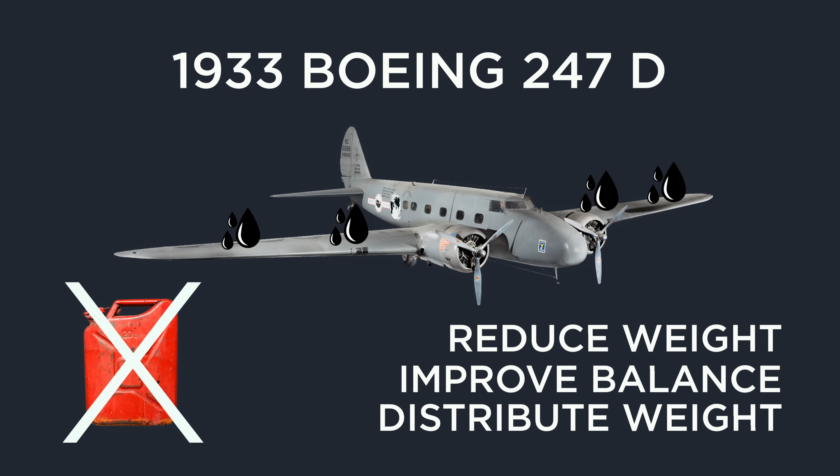They used to have the fuel tanks inside the body itself, but that was until 1933. Boeing 247D, someone came up with a brilliant idea to move the fuel to the wings instead. So why would you do that? Yes, to put the fuel in the wings, you could actually just get rid of all the fuel tanks. So by getting rid of the fuel tanks, you can reduce weight, improve balance, and also distribute weight across the wings.

Here's my airplane. It has a lot of weight in the middle. So when the air is coming under its wings, the wings are folding. It falls down flat to the ground. So what happens if we take these two fuel tanks and move them away from the center of the body and out on the wings? Look at that. By adding the fuel to the wings, we have distributed the weight better, and we have actually decreased the weight on the wings. Look how well it flies.

Perfect. The clever design principle that these airplane engineers used is that they took structural parts like these airplane wings and turned them into functional parts. The airplane needs wings anyway, so if they're already there, why not use them for more functionality than only one, right? This is a brilliant design trick that I think that you can use in your own design.

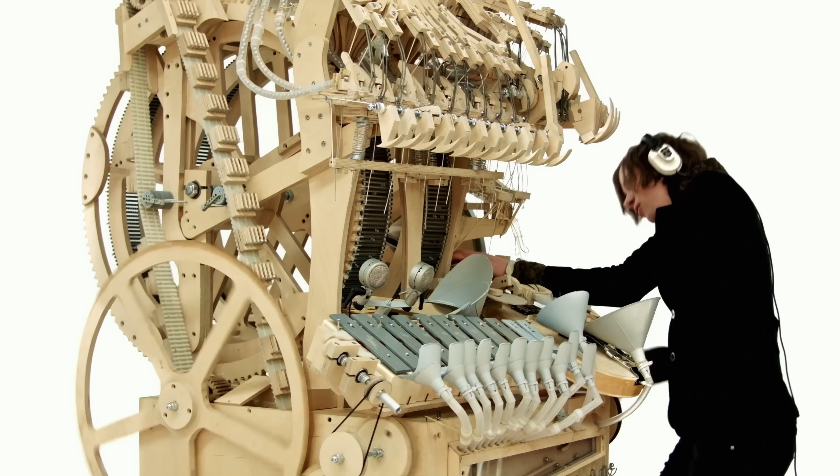So I'm using this trick in my marble machine project. So I tried once building this plywood machine that didn't end up too well. Then I built a second machine, it ended up in the same way, and now I'm trying to become a stronger designer to be able to take on the challenge of Marble Machine 3. So let me show you how I have incorporated this trick. So this is my programming wheel from the Marble Machine X.

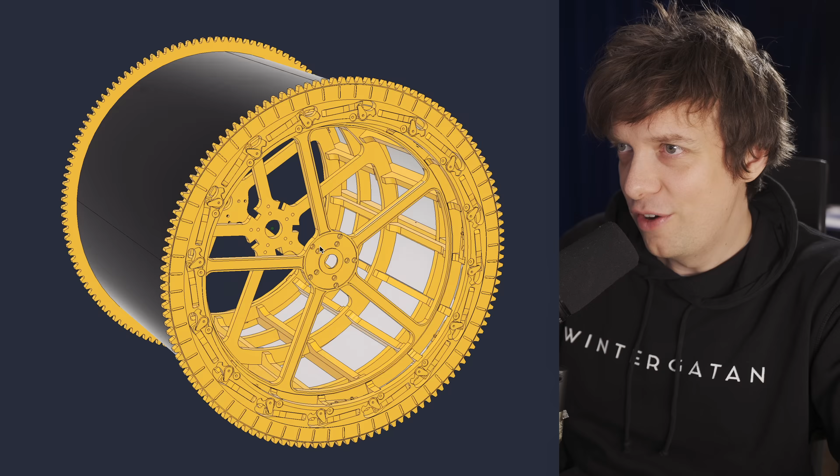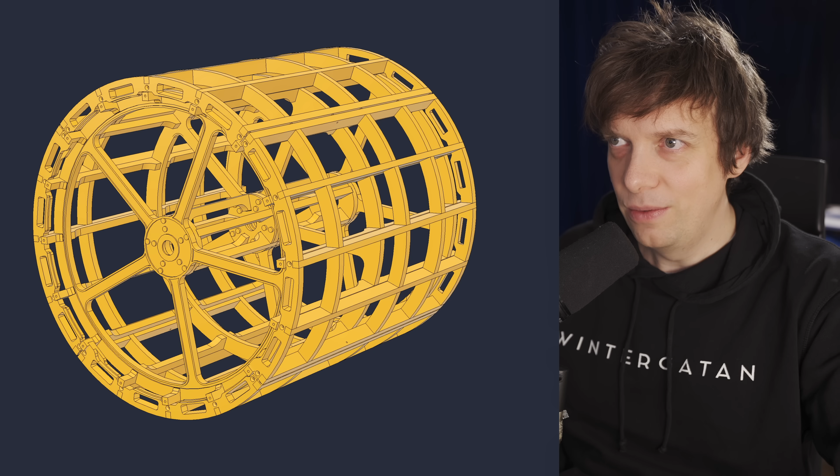Let's take a look at the parts here. We start with the center right here. A lot of structural parts, right? And then what do we have more? More structural parts. So all of this is just to create a solid structure. It was really solid and rigid, great, but it doesn't do anything. What do we have then? More structural parts. And only now we add some functional parts.

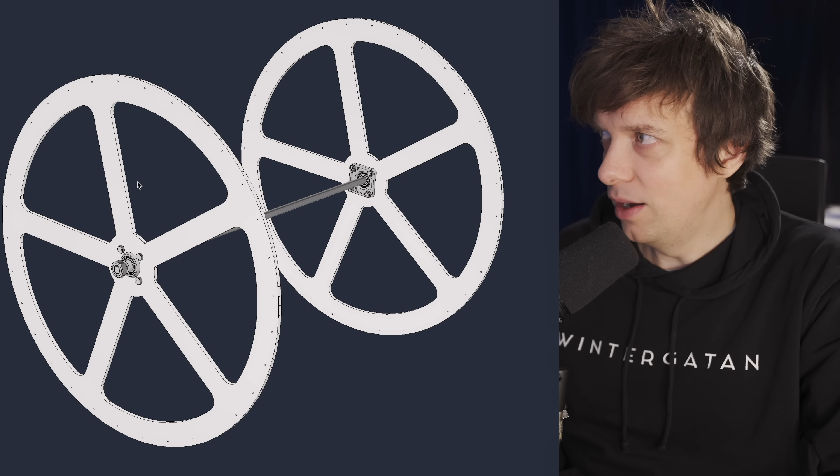So here's the gears, and then we add some steel plates, and then now at the very end, we add these plastic parts. And those are the functional parts. So around 2 million structural parts and 4 functional parts. What did I do on my new design? Well, let's take a look. So we start with the axle like this. Okay, we have some structural parts, 1 and 2 structural parts, and then that was it. 2 structural parts.

Because you know what I did? I made these parts, the slats that I'm making blue here, functional. So these parts are responsible not only for the function of adding the programming pins like this, that's the pins that play the music, they are also responsible for holding the wheel together. So I made my structural parts into functional parts.

That's called fructural parts in the industry. It's not, I'm trying to be funny. And succeeding.

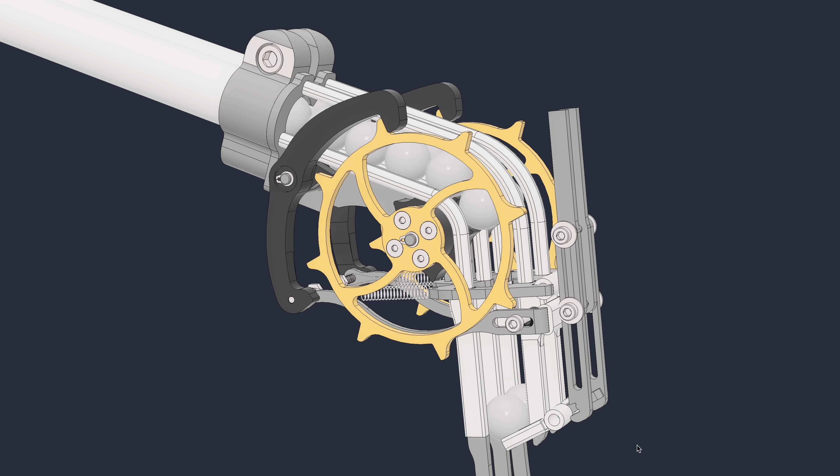Has this implementation made a big difference in the parts list? Oh yes, it has. The original wheel had 142 parts and the new wheel only 38 parts. So that's a pretty good improvement. I used the same trick on this marble gate.

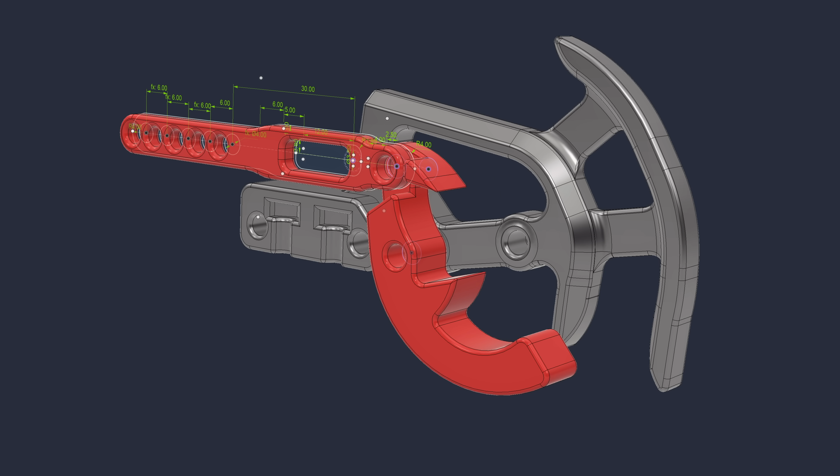So here we have a lot of parts, and some are structural like these profiles, and some are functional like these marble lanes. And on the new gate, I just have one part. So this gray part right here is both the marble lanes and the structural thing holding all the pieces together. I made my structural parts double up as functional parts. The old design had 124 parts and the new design 32 parts.

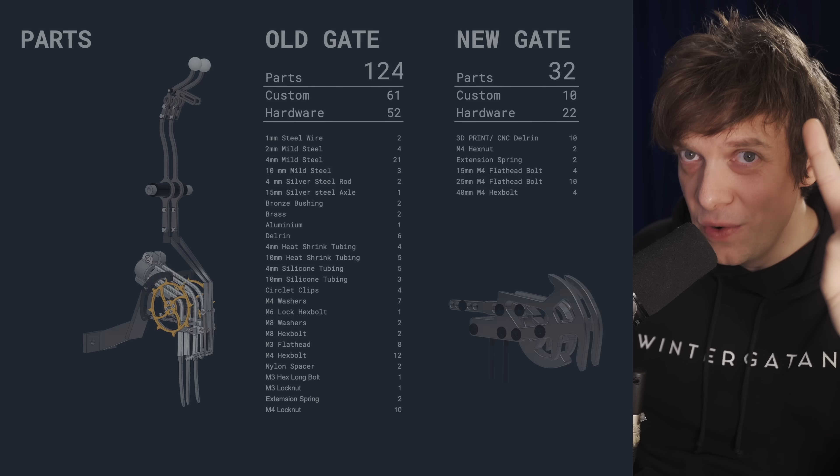From 124 parts to 32 parts is almost 10 times less parts, but I actually used 2 tricks to achieve this on the marble gate. So here's my 2 principles for good design. Number 1, make your structural parts functional, as we discussed in this video. But number 2 is equally important. Make your design requirements less dumb.

If you do this, look how happy you will make Wilson. He's so happy. He loves great design solutions. Efficient, lean, elegant. That's the kind of stuff he's into, you know?

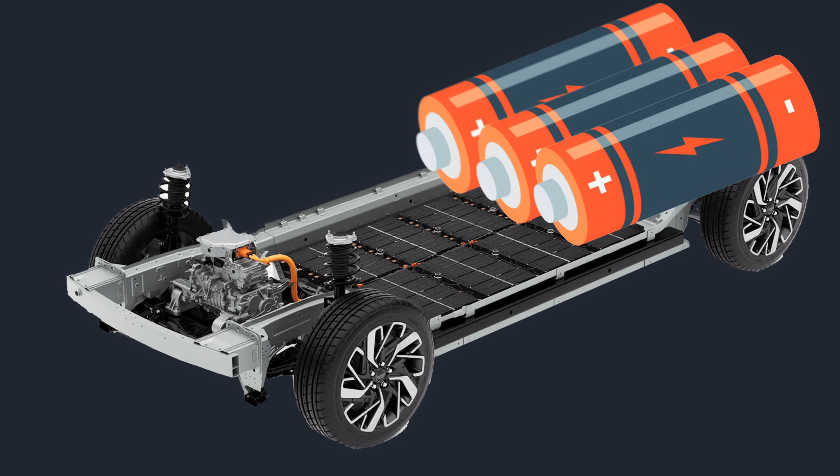Here's another industrial example of the same thing. Electric vehicles used to carry around their batteries like a bag of potatoes, just like extra added weight, and you needed both a frame and batteries. You can say that the frame was the structural parts and the batteries are the functional parts. Could we improve this? Oh yes.

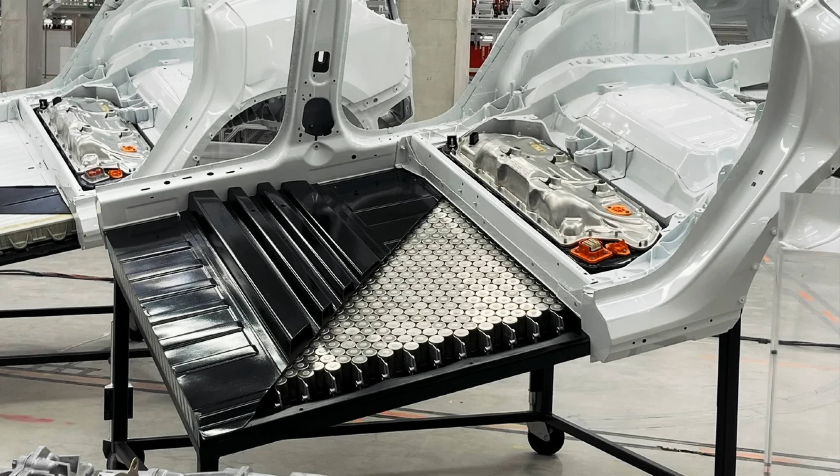Tesla has made this 4680 structural battery pack where they put all the batteries in a honeycomb pattern like this one. And then they pour something that makes it a solid brick, this pink stuff here. Credit to Munro Live for tearing this battery pack apart. And that makes a super stiff torsion box. You can see the electric conductors under there.

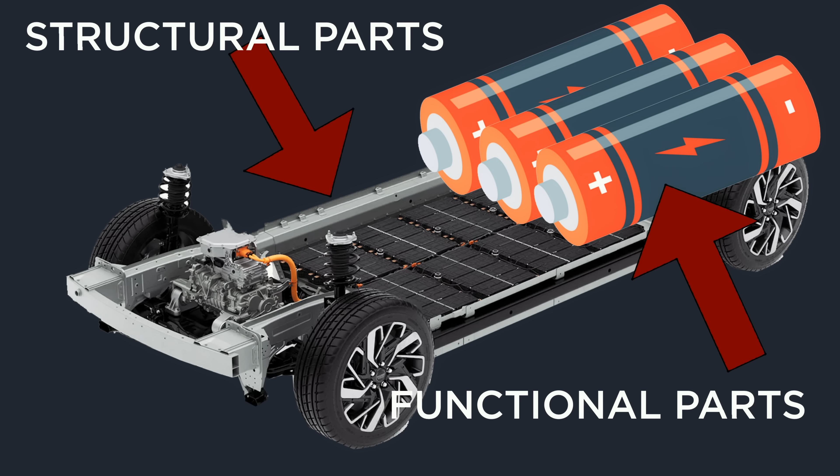So this structural battery pack combines the structural frame with the functional batteries. By replacing the frame, you reduce weight and you get a stiffer structure, which is absolutely awesome. Look how happy Wilson becomes from stuff like that.

My old professor Albus Dumbledore once said, music, a magic far beyond the magic we do here at Hogwarts. And I agree with Albus. When you're into music, time ends and you become immortal. God, I missed that. Anyway, need to get the Marble Machine 3 to work. That's what I'm trying, okay?

So music is the highest magic, right? But I would like to say engineering and elegant solutions, when something clicks in your head, from a problem situation with 3-4 things and you just can't get it together, and all of a sudden everything just opens up. Your airplane doesn't only get lighter, it flies better, your car drives better, and your Marble Machine part count is reduced by 10 times, which makes the project potentially feasible. So yeah, after music, I would say that engineering is a close second.